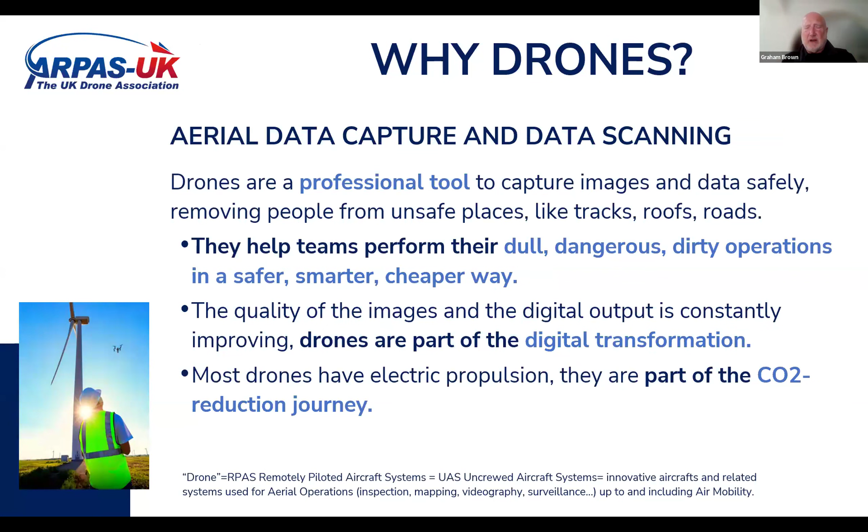Can you just go back a second? That CO2 reduction journey is also part of the equation. Now, I'm focusing on small drones, and I'll explain small and big in a second. Next slide, thanks.

There's this other piece you'll see in the action plan, about eVTOL or air taxis, air mobility, regional air mobility, urban air mobility. That's slightly further away, but from a council perspective, you'll see activity ramping up, because some of the planning and organizational timelines are quite long.

It's a bit equivalent to having charging points for electric cars - you've got to start because it takes a while to get stuff in place. But the scale of small drones, yeah, next slide please.

In terms of the CAA, the Civil Aviation Authority: 513,860 drones registered in the UK. The contribution to the economy - the PwC report said 42 billion by 2030.

You can take that - we don't really know. The point is, it will be big, and will have an impact across a lot of different areas, which I'm hoping to go and explain.

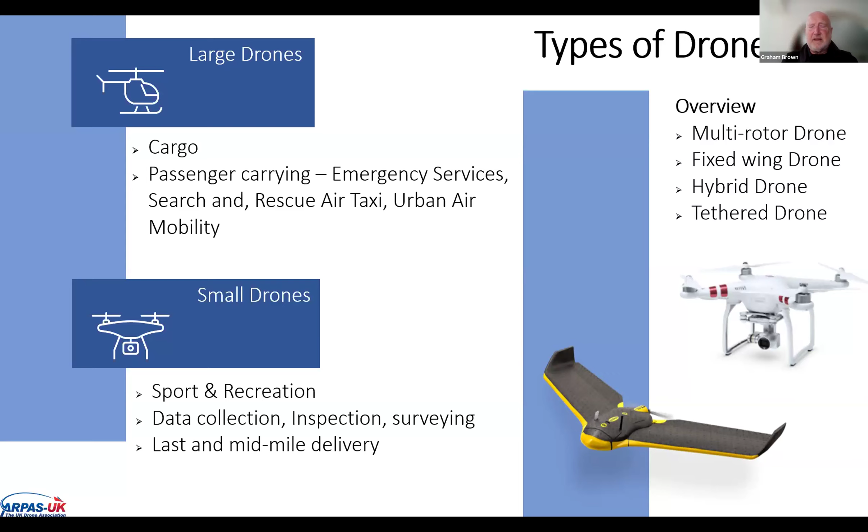Top right, it's not just one thing. There's multi-rotors, there's fixed wings that look more like a plane, that grey and yellow thing there. There's hybrids where they're fixed wing but do vertical takeoff. And then you've got tethered drones, which can be used to monitor something in place, if you need something monitored for any sustained time, because they get power through the tether.

The large drone - this is a little bit cheeky because I use this one to say, look, we've actually got to get on and do some of this stuff. But you can see examples of the hybrid and the helicopter-like thing, the bottom right picture. They will need full certification - they will go through the same rigorous process as helicopters and planes.

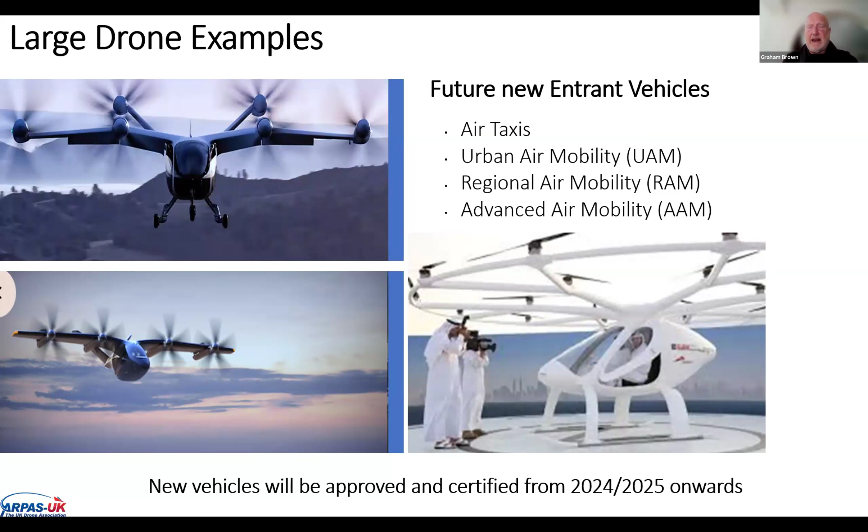The reason for having the guys there in the Arab dish-dashes was a message to say, unless we start working on getting this done now, we will be behind other areas in the world. And Dubai have already announced, as you might guess, that they're going to run an air taxi service during this year. But my focus is small drones.

This is a slide that I've borrowed from SASIG.

Hopefully any of the councils on the call know who SASIG are, but they're a special interest group of the Local Government Association, and really includes, I'm guessing, Southend and other areas like Reading and what have you. Anyone who's got an airfield is mostly a member of SASIG, that special interest group of the LGA.

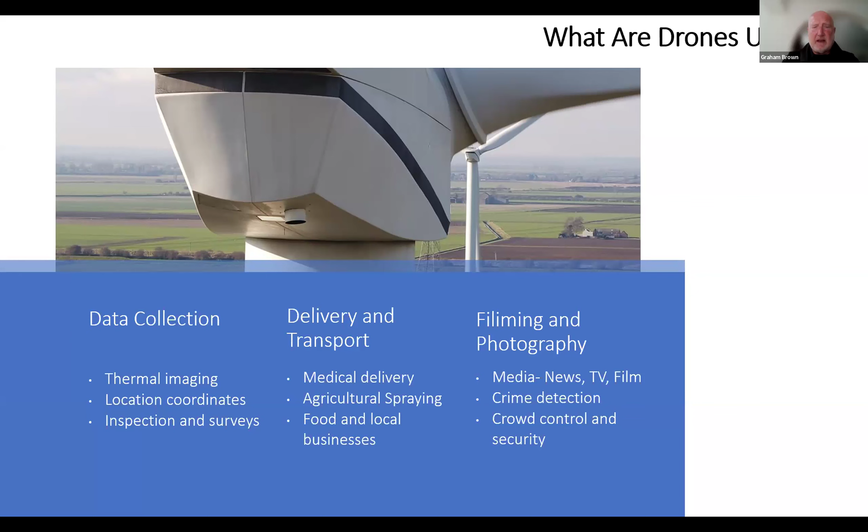And this is the long list of use cases. The only reason I use this is really to get across the message that it's sort of fairly pervasive where they can be used and how they can contribute.

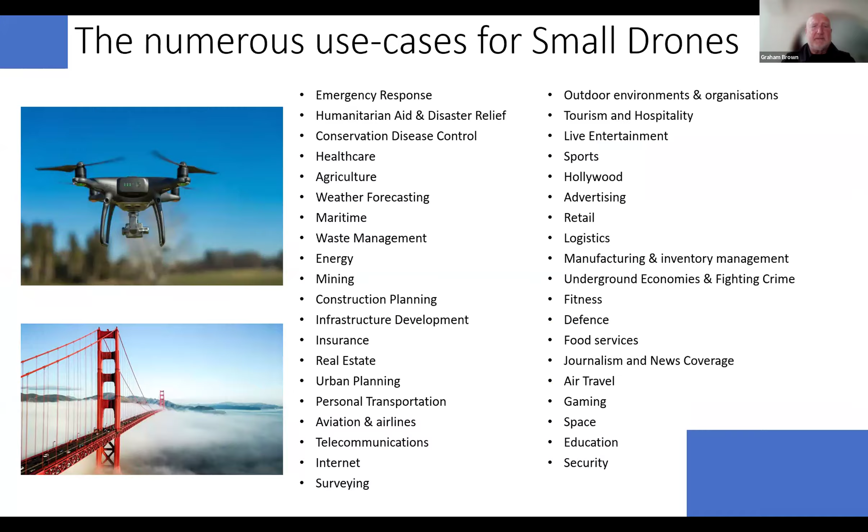That's not the things that shoot in wars, that's the storage tanks, and they're inspected internally for condition. Quite often, depending on what they've had in them, they're quite dangerous because there's gases left in there. This was taking normally 60 days to inspect 20 tanks, and it's done in just 9 days. So that cycle time and that efficiency is really quite interesting if you're trying to save money and you're trying to allocate budgets that you currently spend on X and move them to Y, which I think is a challenge that most local governments certainly have today, and pretty much every organisation.

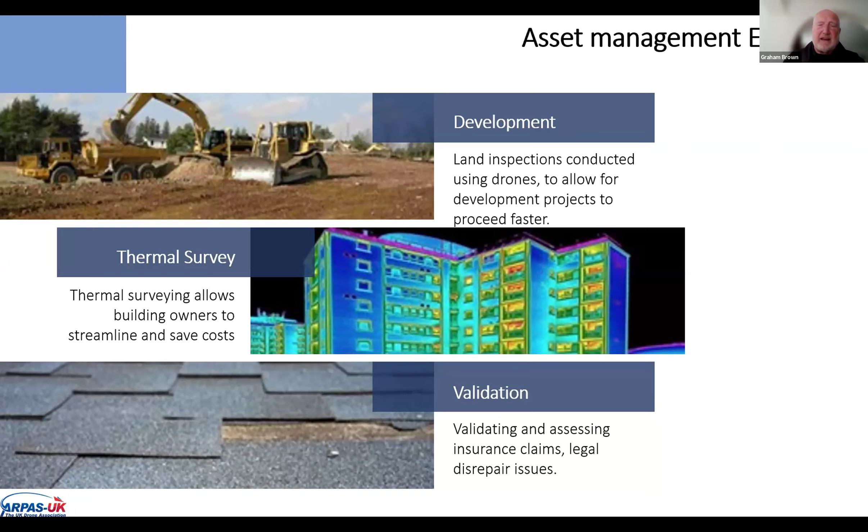And then last but not least, validating either insurance claims or when you've commissioned repairs that they've actually been done satisfactorily. So now we're going to go into a couple of projects that were done. This first one was a church. You can see the picture of the church there, the different roof levels and what have you. And you can tell that it's not an easy roof to get up and inspect in one go.

And Yorkshire Housing had been told that it would cost 350 grand - it needed a complete roof replacement. There was a couple of hours flying involved with the senior surveyor looking at it, and he could have been in his office, but he was actually on site because it was the first one they'd done. He was looking at the screen, and once they got the data, they worked out that they only needed a 50 to 60 grand repair, not a complete roof replacement.

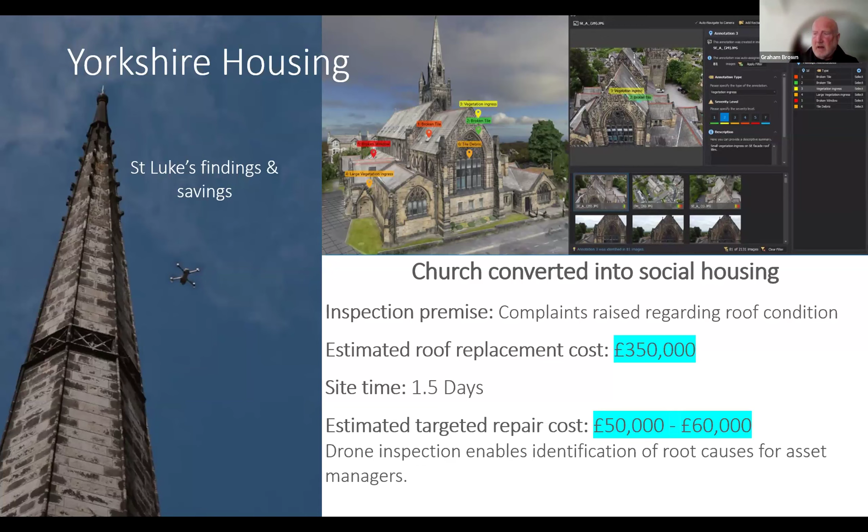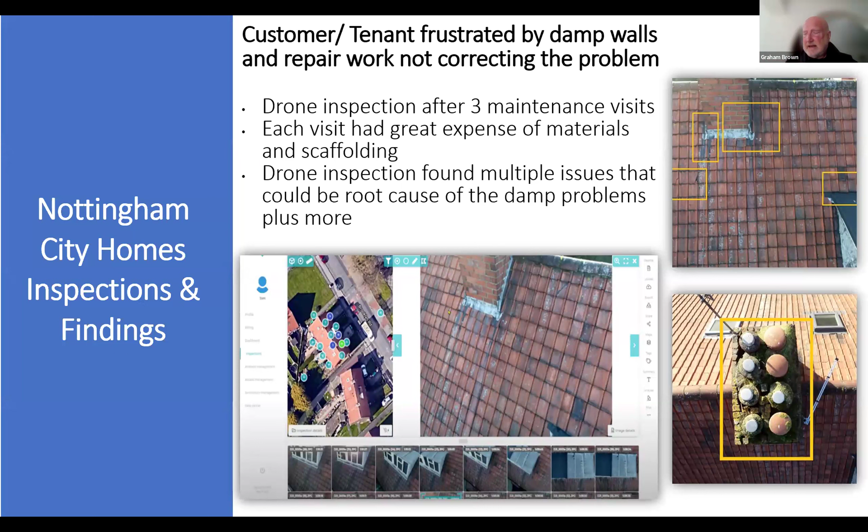So again, significant savings. This was Nottingham - they'd had continued issues with complaints and putting expensive scaffolding up to go and inspect. The drone inspection allowed them to focus in on some of the problems that were causing the issues and actually get them repaired. And again, another social housing one, particularly these savings for high-rise inspections.

The point I'd make, and David can cover it if people have questions, is it doesn't require an upfront investment. You can buy a service, get this work done without having spent a fortune. So you can start making the savings before you've got any outlay.

The reality is that will reduce. I think social housing's annual budget for repairs and maintenance is over 6 billion. So savings on the high-rise element, even if the average savings are only 10%, which is lower than any of the estimates, it's still very significant.

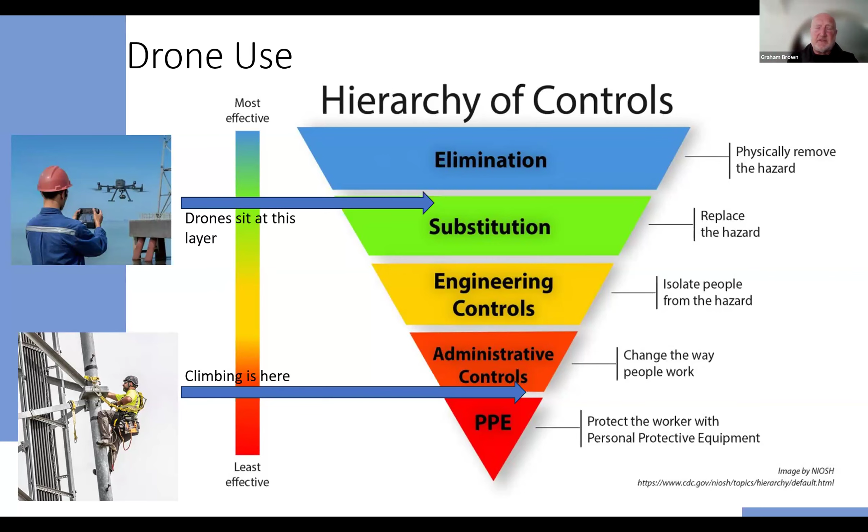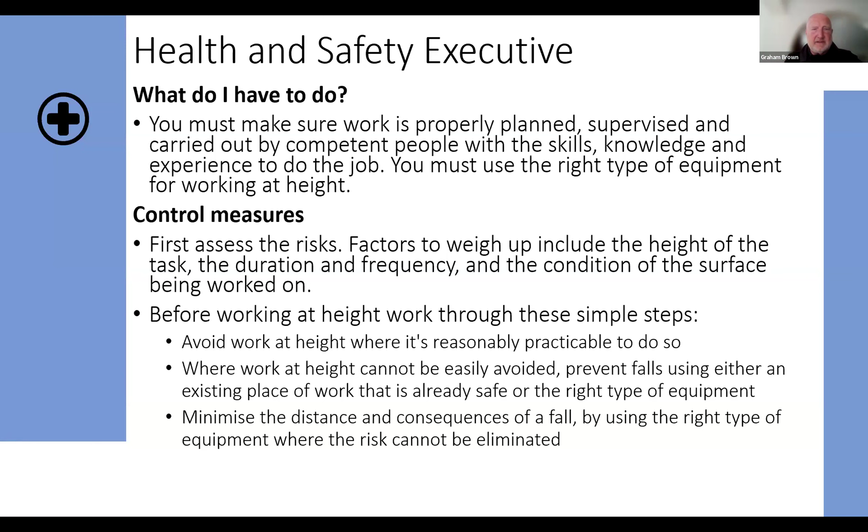The next piece, again I'm not going to go through this slide, but it's really saying you've got to look at how you control it, and the health and safety executive are fairly clear - if you're going to avoid working at height, please do it. There's another slide that puts the bullet points: do as much as possible from the ground. That basically is drones. It's worth considering, because I firmly believe that at some point in the future, if you haven't considered alternatives to putting a worker at height, you will potentially be in trouble if there's an accident.

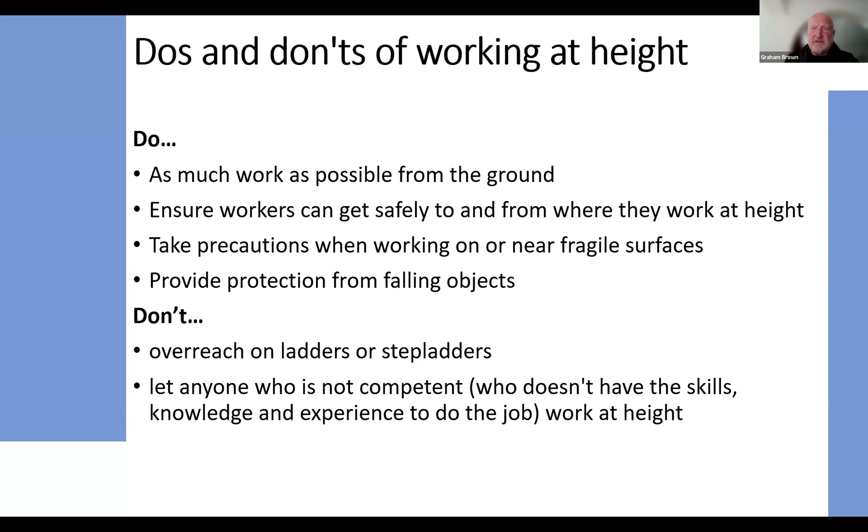So I'm now going to talk briefly about the future. Happy to take questions on any of those pieces, and as I said, David will cover it again.

The future use - this is now talking about, we formed the Future of Flight Industry Group. I think I got the invitation in the back end of 2022 for the first meeting, because if you remember back there were a few government things changing at the time, so we kept replacing the current aviation minister, who was meant to chair the group. We had the first meeting in March, about a year ago, 8th of March, of the Future of Flight Industry Group.

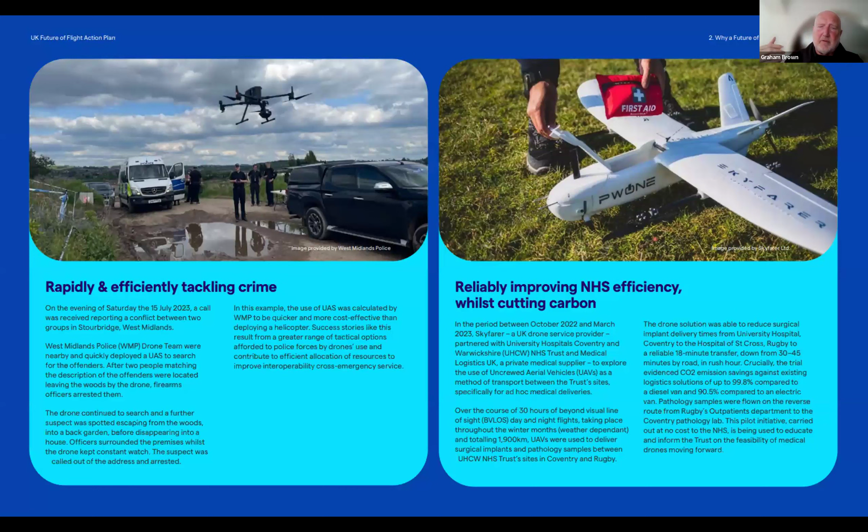So on the left, there's the emergency services. On the right is NHS delivering stuff either to remote locations or speeding up places that have got a lot of congestion. And then you've got regional air mobility, moving people between locations safely and accurately and efficiently.

That's the one that we're sort of focused on, because we can do all of that today, and it makes massive savings and safety improvements. And then connecting Scotland's Highlands and Islands is the other example, because clearly there are physical barriers between getting stuff around there.

So that's all I wanted to say. I'm now going to pass over to David Holmes from InView Assets, and he's going to touch on a few things, and then hopefully we'll have a few minutes at the end for any questions.

Thank you very much. Thank you, Graham. Hope you can all hear me. We haven't really done any sound checks or anything. I'm assuming it's all working - I'm hotspotting off my phone in the corner of this room from the airport.

What I wanted to talk to you about is from a different perspective from me. We're a digital data capture company, and we happen to use drones as part of our toolkit, a bit like a screwdriver or a spanner, in order to do the job for clients. We've been pushing at the area, particularly around social housing, and large infrastructure through universities, to try and work with them to see use cases for drones.

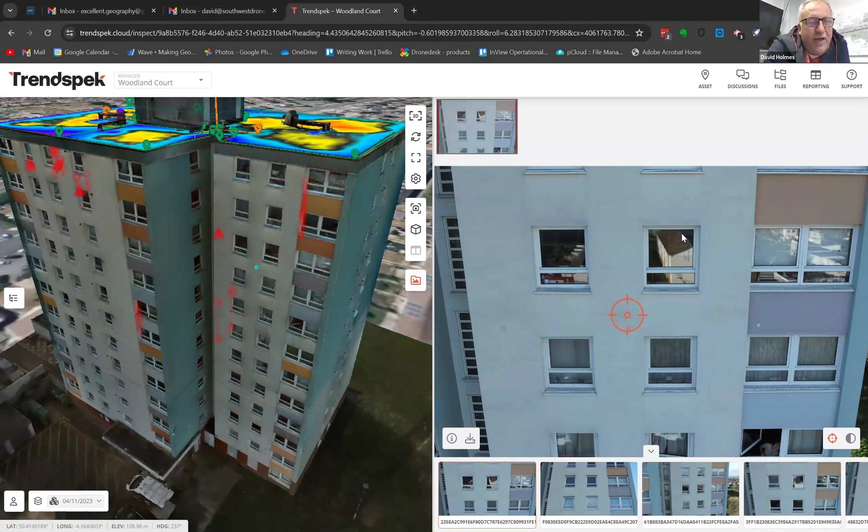Sorry, Graham, can you not see it? You're on mute. I was muted, apologies - someone had to do it. I can't see any screen share, so I think in the interest of time, go to the slides. Okay, we can always follow up. Yeah, okay, I apologize, it's probably because the internet isn't great.

The next slide, please, if that's all right. So the next handful of slides I've got are just illustrations of examples, and again, I think it points to what Graham's been talking about in terms of evidence of saving. We think the sort of sweet spot for a lot of this drone technology is particularly around high-rise buildings, especially in terms of the conversation around proactive rather than reactive maintenance. Graham has made a very clear point that often you don't really know the condition of different parts of your building if it's a high rise, because of inaccessibility and because of the cost of essentially getting access to it, whether that's abseiling or putting scaffolding up.

So we think that conversation around proactive maintenance, but very targeted, is very, very important. And indeed, we're a RICS technical partner, and they've written quite a lot about that. There are a couple of examples here that are in the public domain. One of them is Southampton City Housing, and again, this sort of figure of quite large returns on investment because they're able to target the maintenance. You can see that example there - again, it's a high-rise building. So can I have the next slide, please?

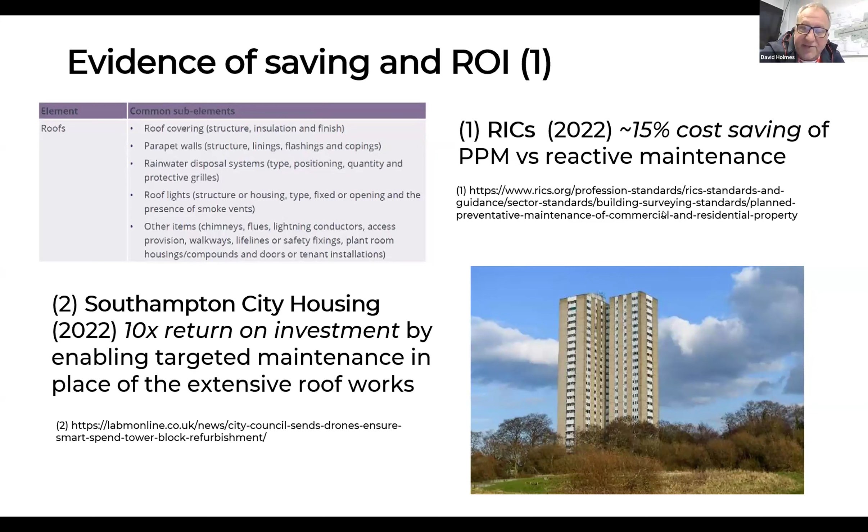So let's give you a couple of examples of some specifics in our experience of working with Plymouth Community Homes down here in the southwest. I'm based in Somerset, and we've had quite a long ongoing conversation with this particular social housing provider.

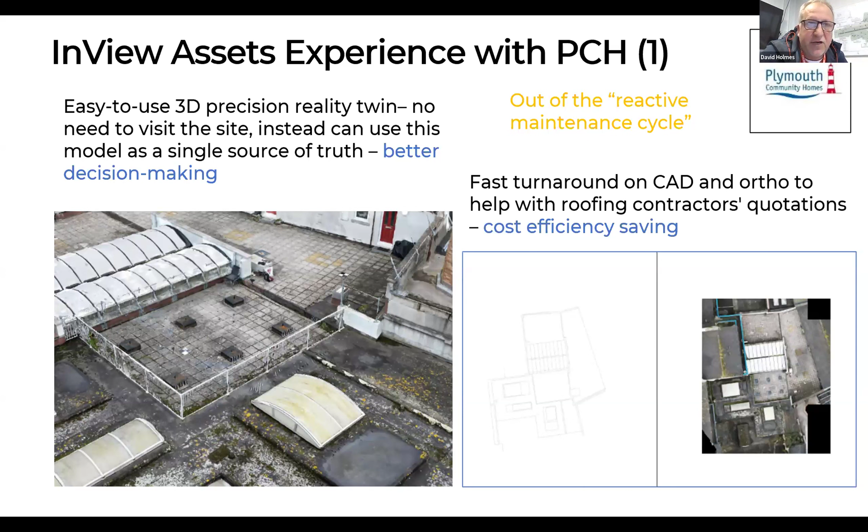You haven't seen this because I couldn't screen share it with you, but I tried to show it. This is a place called Woodland Court in Plymouth. They've got several of these high-rise buildings, 1950s, not a lot known about them except the fact that they are always in repair. So they don't have particularly detailed plans or overview of them. There's several things that are quite challenging about the maintenance, in terms of it's got a flat roof.

So we have a flat roof deflection tool that we can deploy so that clients can see where you're likely to get pooling and standing water. You don't need to send anyone out on the roof to be able to do that, we can capture that very easily. So that's a reduction in your safety risk and improving your risk mitigation.

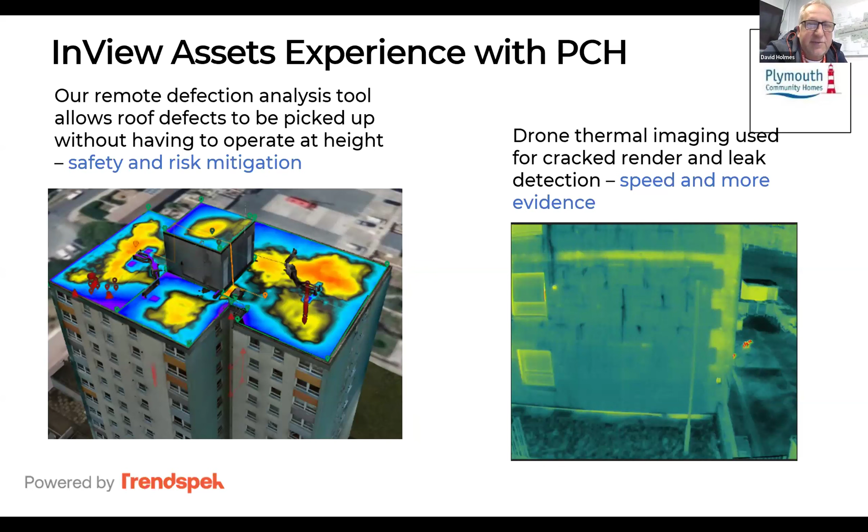We might also typically combine a survey of the elevations using a ground-based technique as well as drones with something like a thermal camera. And that gives another source of truth for things like cracked render. So once you have your high precision reality twin, plus you have your thermal camera, you can bring the two together and say, we are definitely, the render here is defective, I can target that particular place. Again, no scaffolding involved in this, so increasing speed and giving you more evidence.